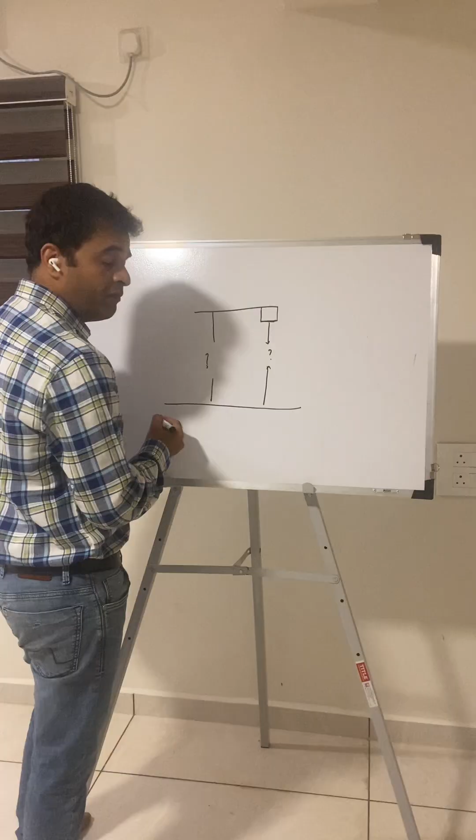Now this is the slab. Now this is the floor. Now this is the height between slab and the floor. There will be a beam, which is a conventional structure. Now this is the height between unfinished floor, or you can say finished floor. From here, bottom of the beam, what is the height? Now why is height important for us?

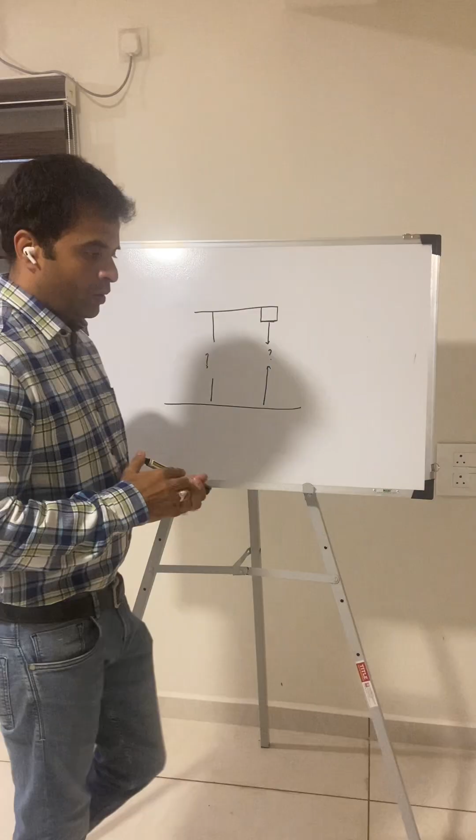The height that we require for these kinds of facilities is mainly for running the services above the fall ceiling.

Now one more doubt arises. Can I fix my operation theatre light and pendant if I have a fall ceiling height of around 8 feet 5 inches? Or do I have to have 9 feet or 10 feet height only as far as fixing the OT lights and pendants in the operation theatres? No, it is not so. Irrespective of the fall ceiling height, you can fix your operation theatre light as well as pendant. We will talk about that a little later. Let us understand why height is important as far as above fall ceiling is concerned.

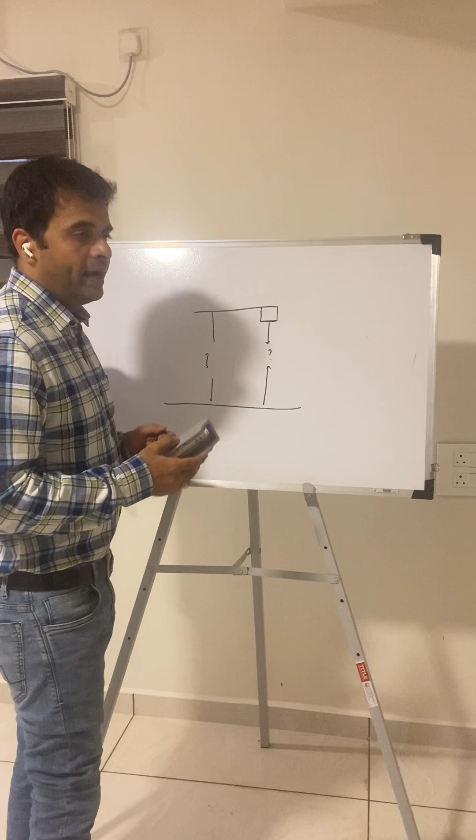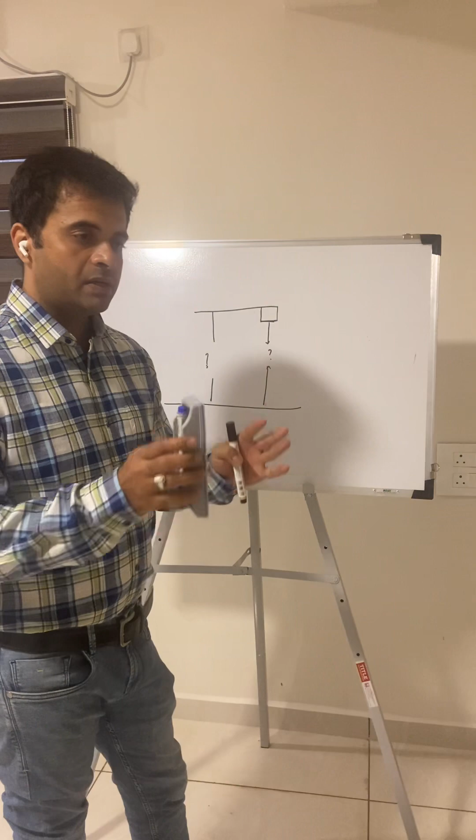Now this is a conventional structure. Why is height important? Height is important to run the services above fall ceiling, provided you are following clean room concepts. Do not bother about the height of the slab from the finished floor level if you are operating your operation theatres and ICU with a split AC, which is a total deviation from the regular standards. If you are operating with a split AC and you don't require even the fall ceiling, and it's a clean environment out there, so even if you have around 9 feet of fall ceiling height also, it's okay, no problem.

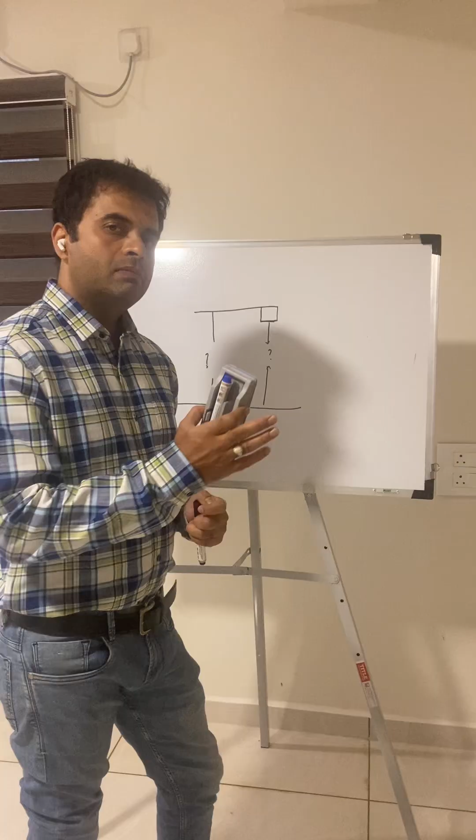But that's a deviation from the regular standards. If you are looking for clean air inside your operation theatres and ICU, then you require a particular height that is needed only to run your services, especially the ducting. Now when you want to achieve the clean room inside your operation theatres, there are guidelines given by ISO 14644-1.

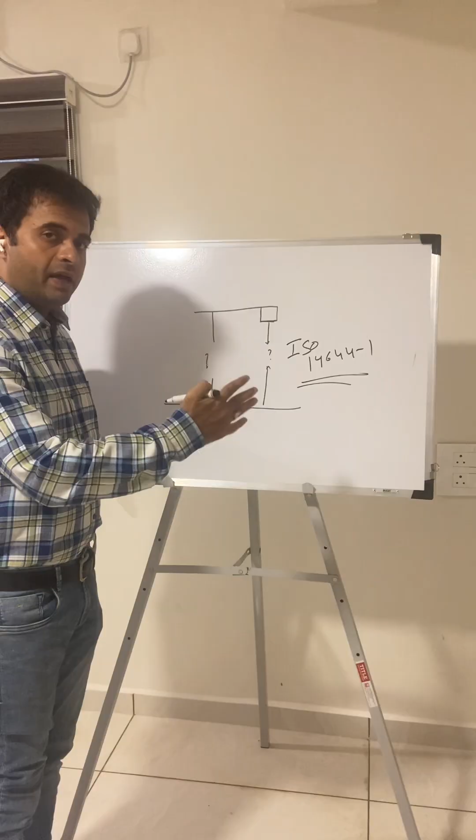I'll just write down the guidelines, you can Google it. ISO 14644-1. Now this defines a classification into ISO 5, ISO 6, ISO 7, ISO 8, ISO 9. Let us see ISO 5, 6, 7, 8 and 9.

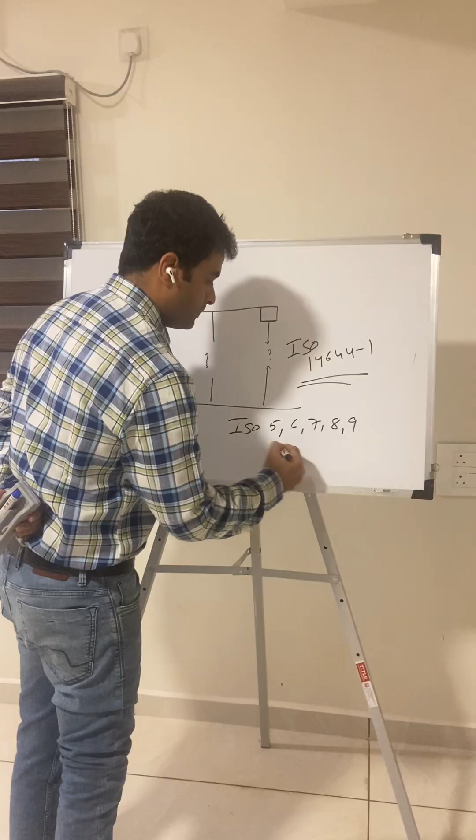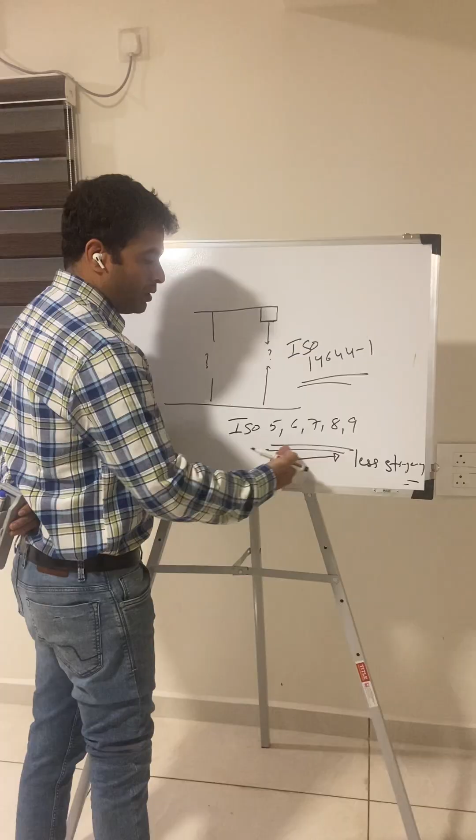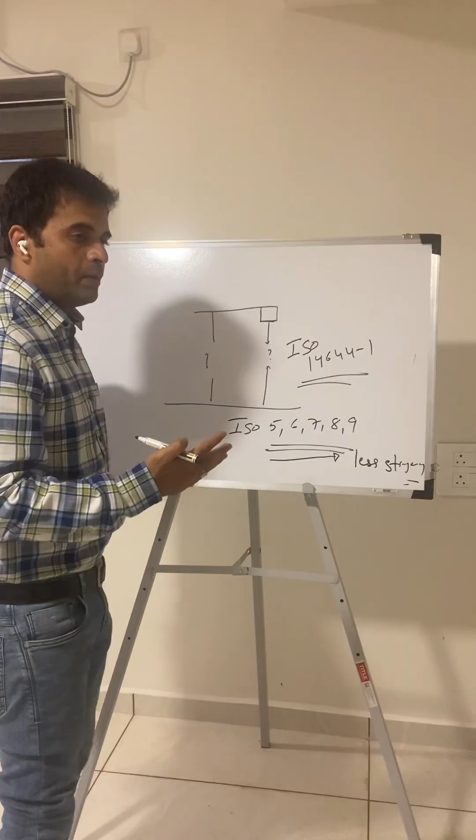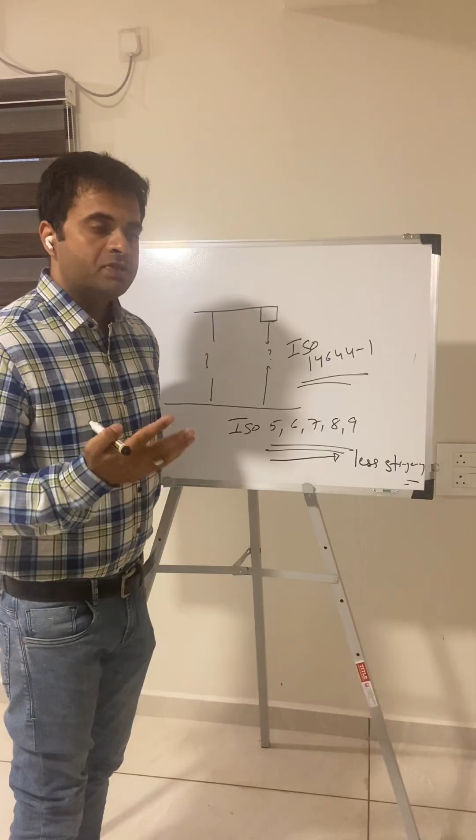Now, more the ISO certification or parameters that you follow, less is the stringency. That means the more towards ISO 9 you go, the classification gets deteriorated, I would say. So if you have ISO 5, that means your environment is highly maintained, more stringent protocols that you are going to follow in ISO 5. Same way, ISO 9 is less stringent.

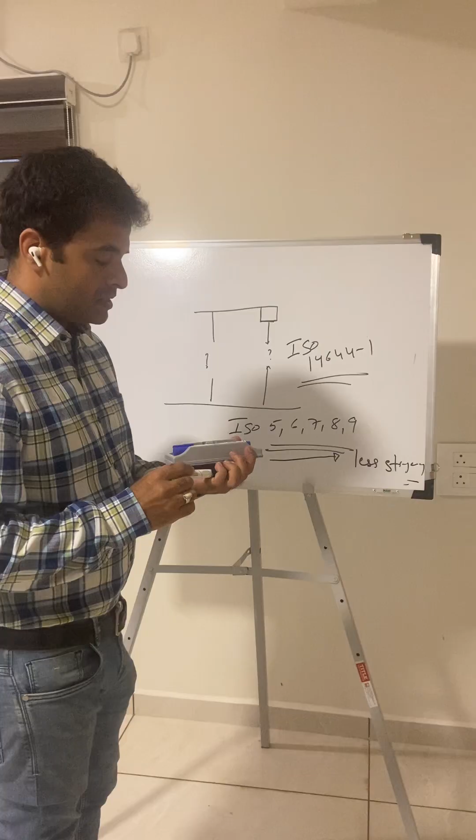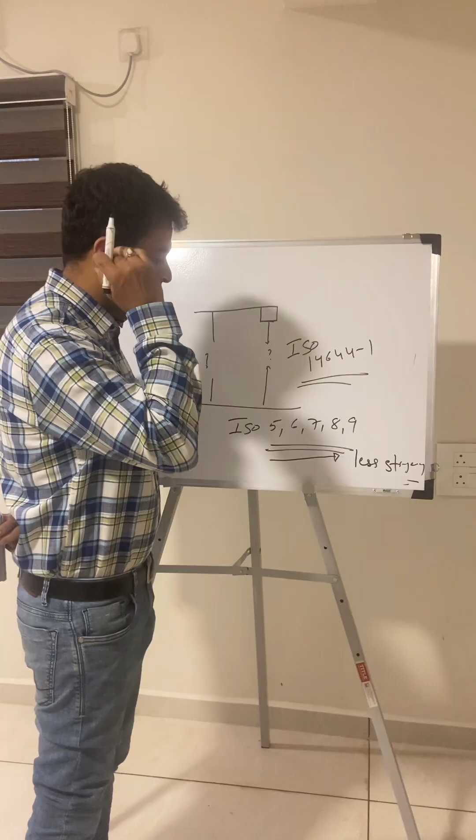So now, as far as operation theatres and ICU are concerned, I personally believe that at least in your operation theatres and ICU at the table level, I'll explain what is table level and what is filter level. At least for the table level, you have to achieve ISO 7.

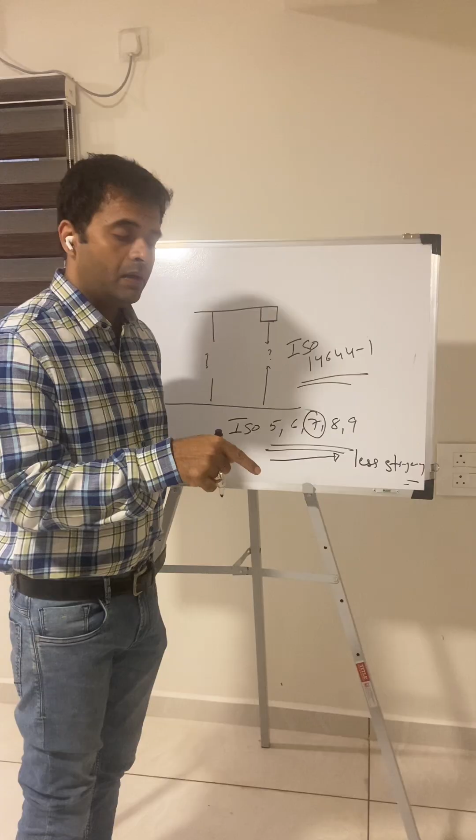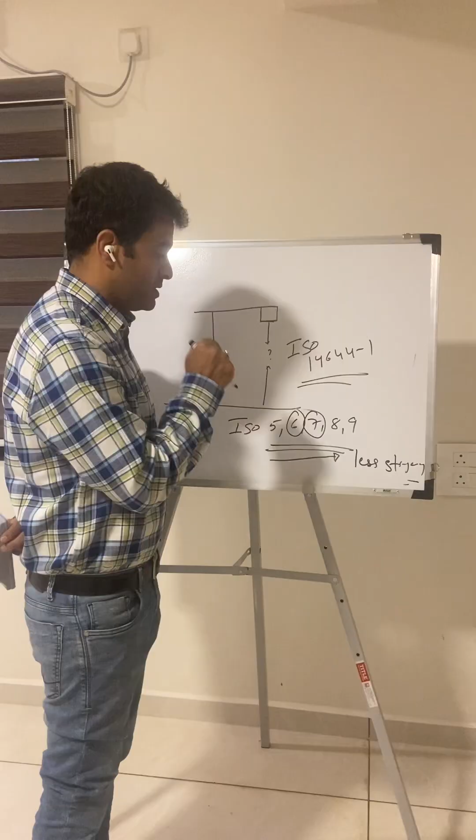Now, to design ISO 7, to have a validation report at table level ISO 7, you have to design at the static load at least minimum ISO 6. So when you design as per ISO 6, there are more chances that you will definitely achieve ISO 7 at the table level, at the peripheral level.

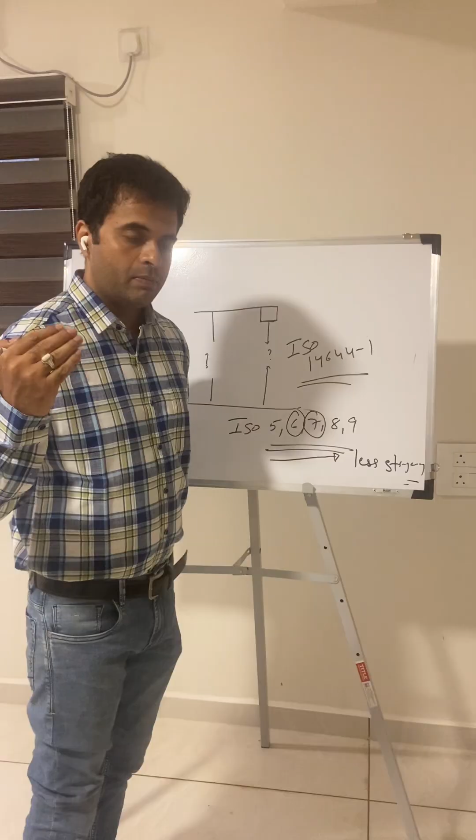So to do that, there are proper calculations as far as air changes per hour is concerned. The subject is a little deep, so we will cover it up when we take up those detailings.

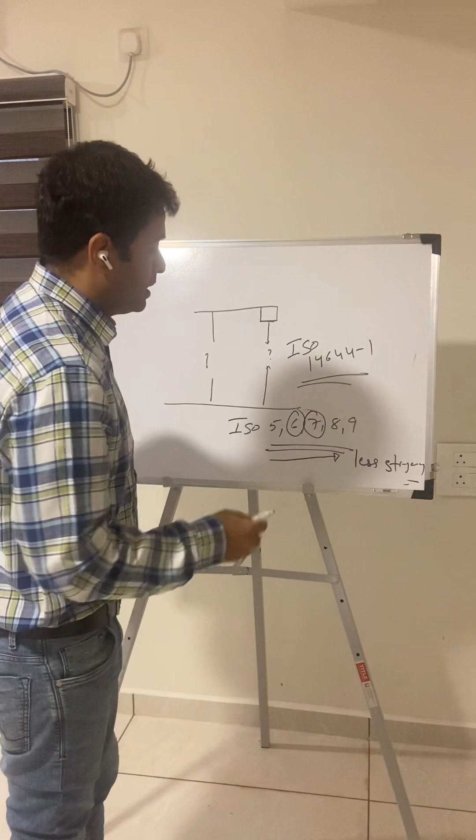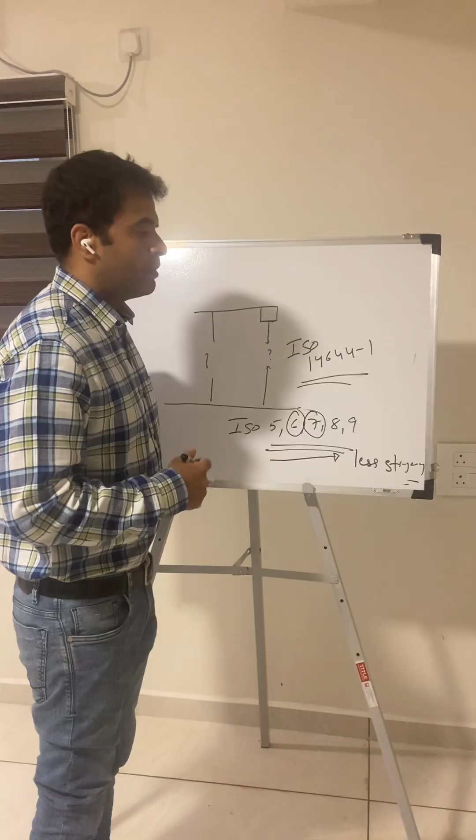Now let us understand, we are at ISO 7. What is table level, what is peripheral level? So to have a proper height to run my ducting, that totally depends on what the client is expecting. If the client is expecting just ISO 9, then we can manage with whatever height that you have. If the client is expecting to have split AC in their operation theatres and ICU, we will adjust whatever height that is possible. So now let us understand what is table level, what is peripheral level.

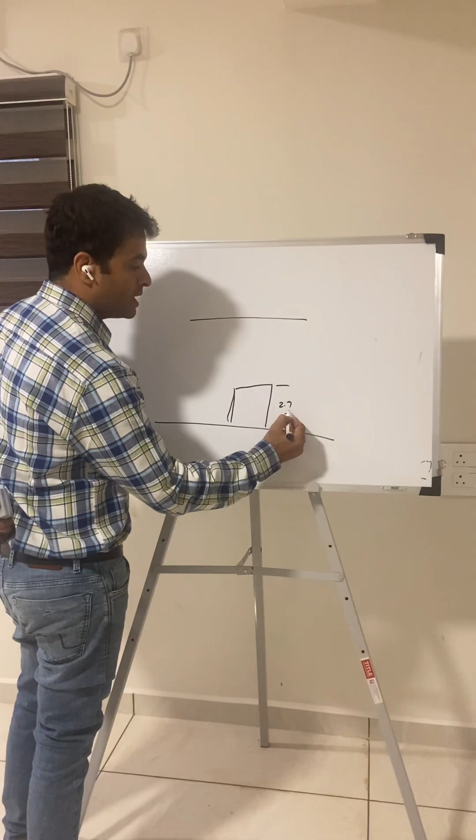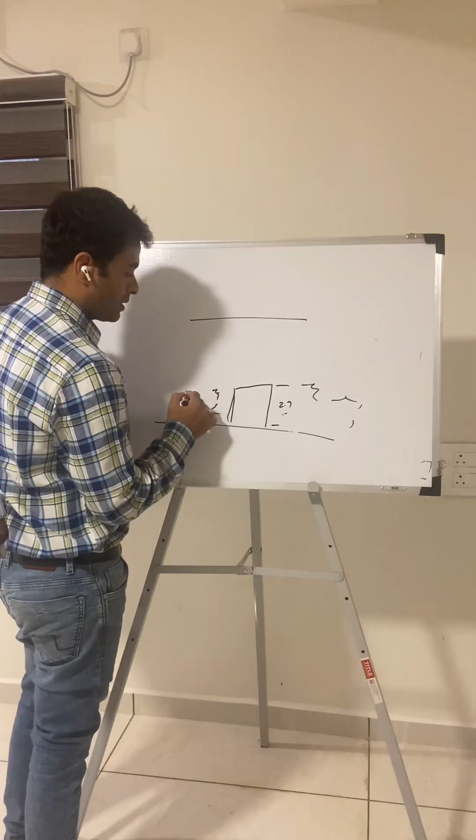Now this is your false ceiling, and this is your floor. You are operating on the patient from this area, from the floor somewhere around 2 feet 7 inches, with adjustable OT lights and OT tables. Now imagine at this juncture, if you do not have proper particle control, then what's the point in having the laminar flow? The air is coming from here.

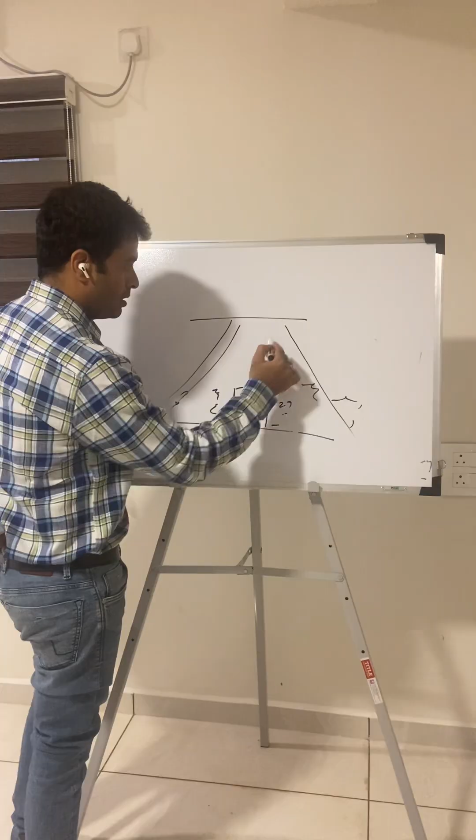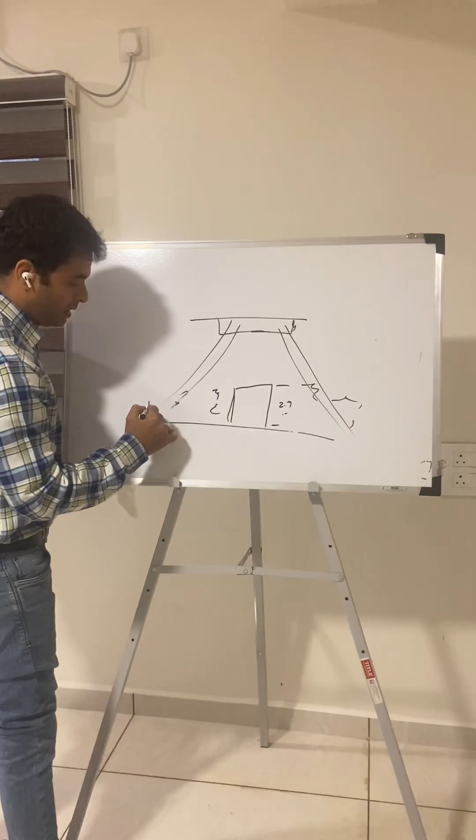So now we'll talk about this. This is a filtration level. Air coming from the HEPA module is again taken back from these risers and goes back to the system again. Okay, now this is the OT table.

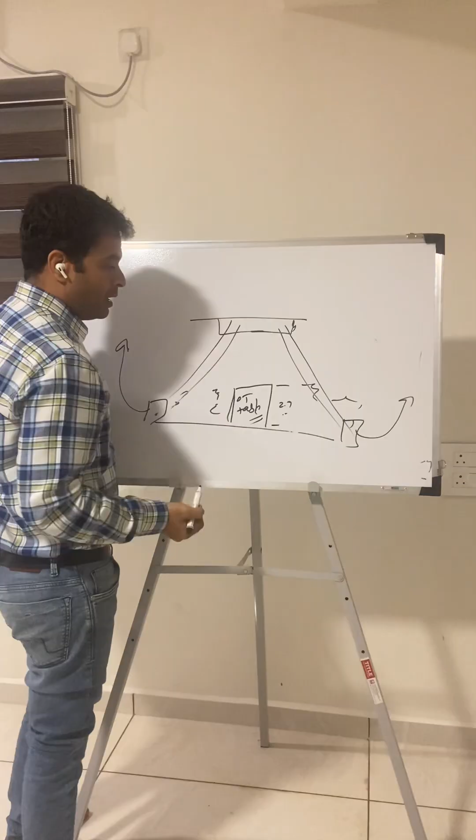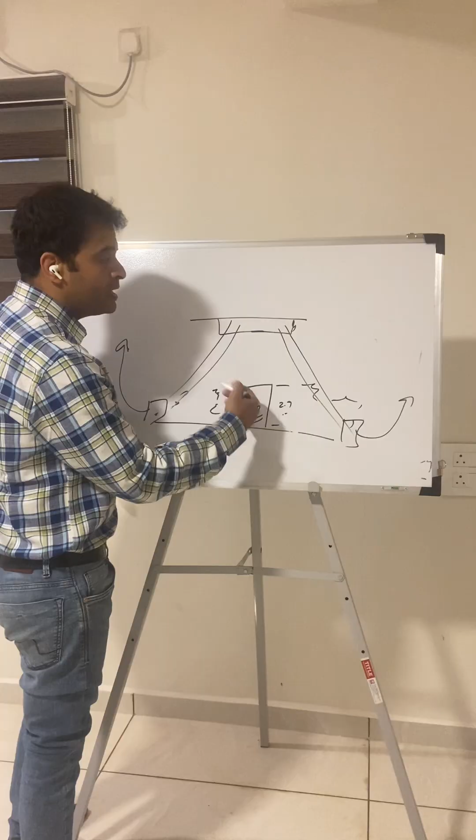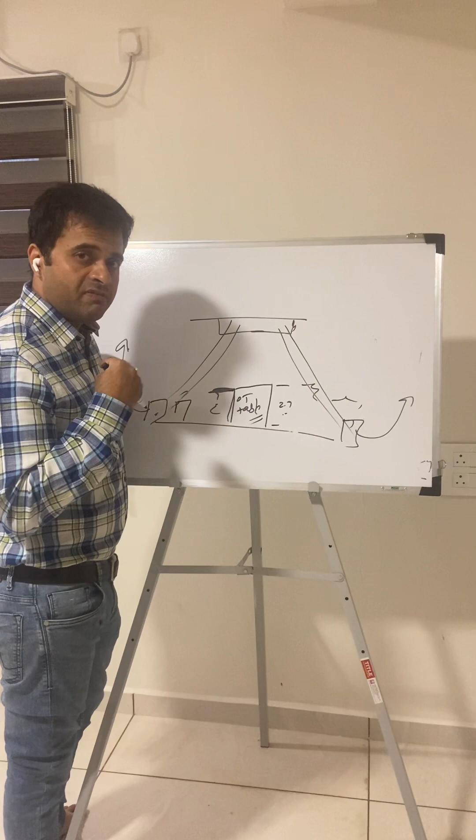Now when you do not have proper air management, or proper particle count at the table level, then there is no point in doing this entire clean room activity. So I personally believe you should have good validation results at least at the table level. Here if I keep my particle counter, I should achieve ISO 7. And also if I keep my particle counter at the riser level, I should achieve ISO 7. Then I can define that this operation theatre or ICU is complying with ISO 7 classification.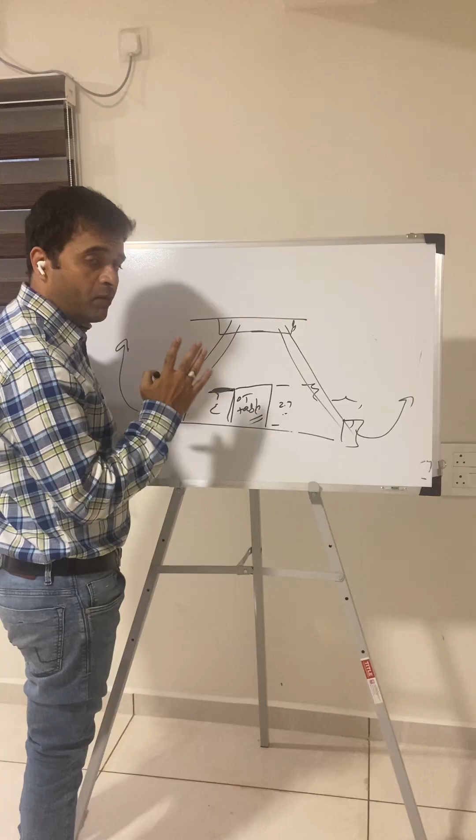A proper validation has to be done for that. So proper validation has to be done before we conclude that this operation theatre complies with ISO 7 guidelines. Minimum achieve ISO 7 in the operation theatres and ICU.

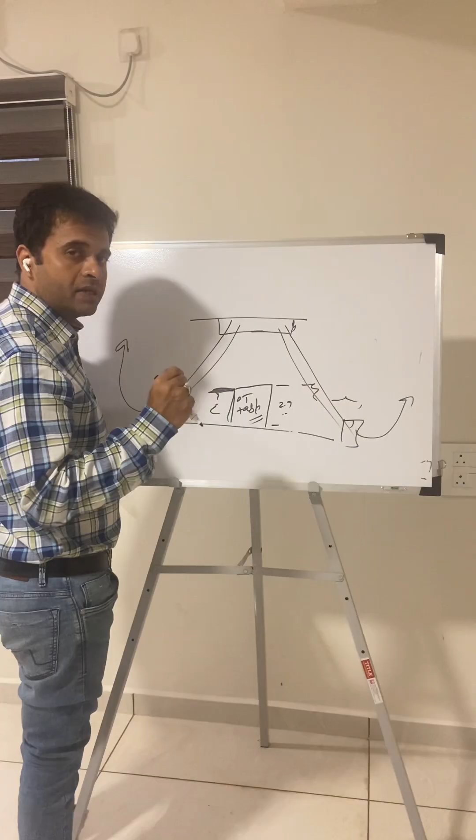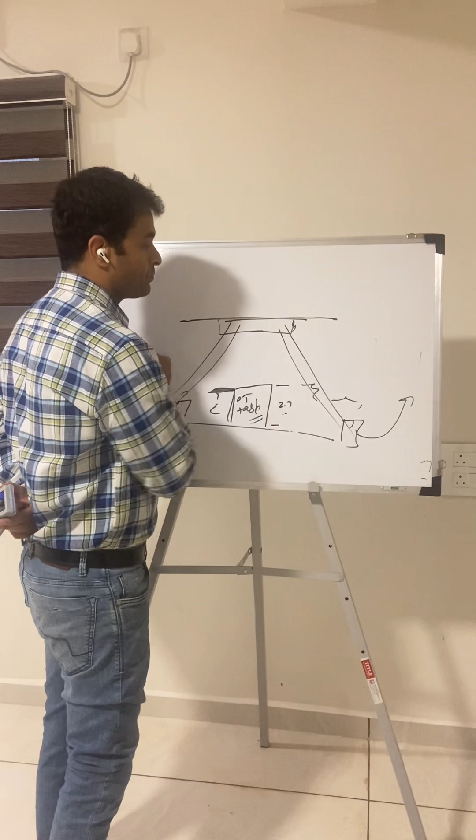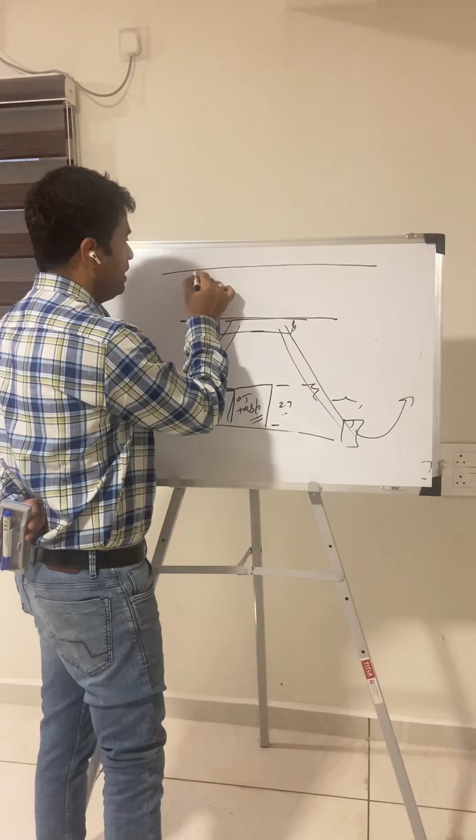Now, when I have to design all these aspects, height plays a very important role for me because this is the false ceiling. Now this is the slab, a civil structure slab. Whatever ducting I have to run between the false ceiling and the slab, within this area I have to run all my ducting.

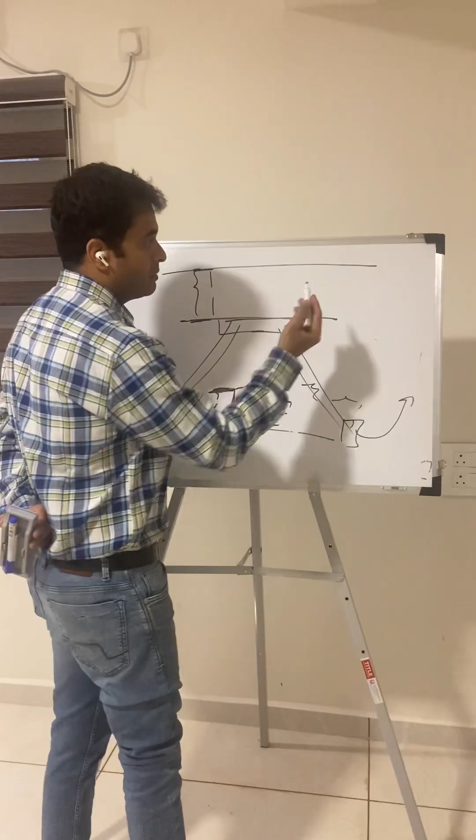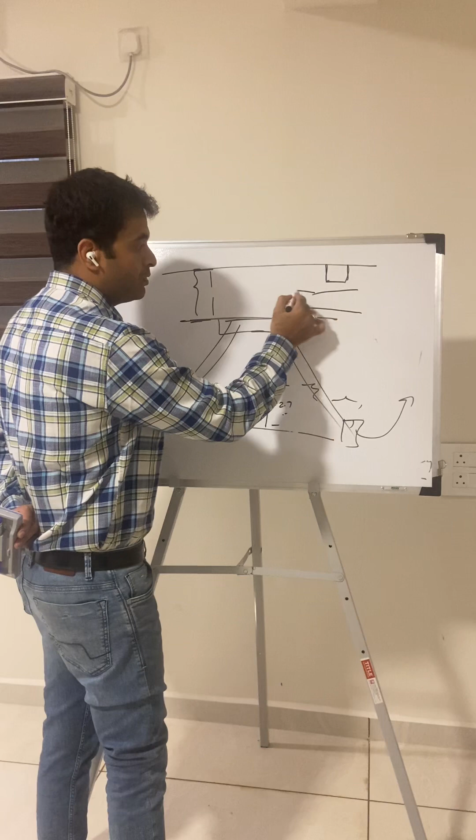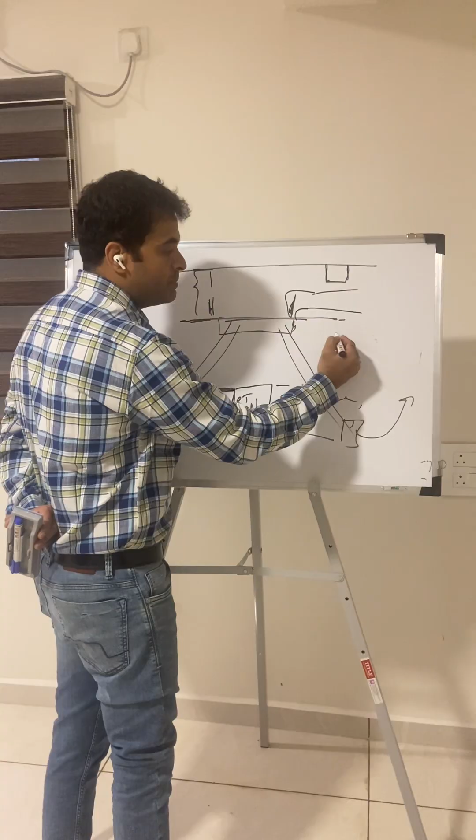Imagine I require somewhere, this is the space, this is the peripheral beam. Every building will have peripheral beams running around. Now if I have to run my ducting and supply to this particular area, this is the plenum box, flush toward this. When I have to run my ducting here, I have to have a certain space because this is predefined. At least minimum 8 feet 5 inches is what I am expecting as a false ceiling height from finished floor.

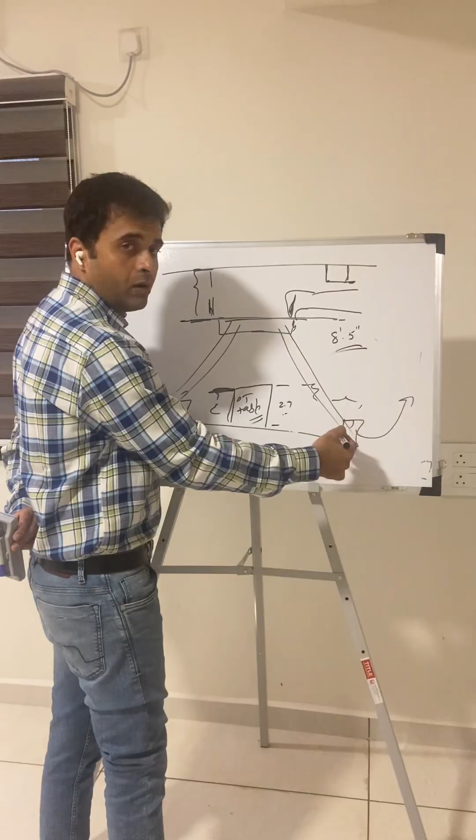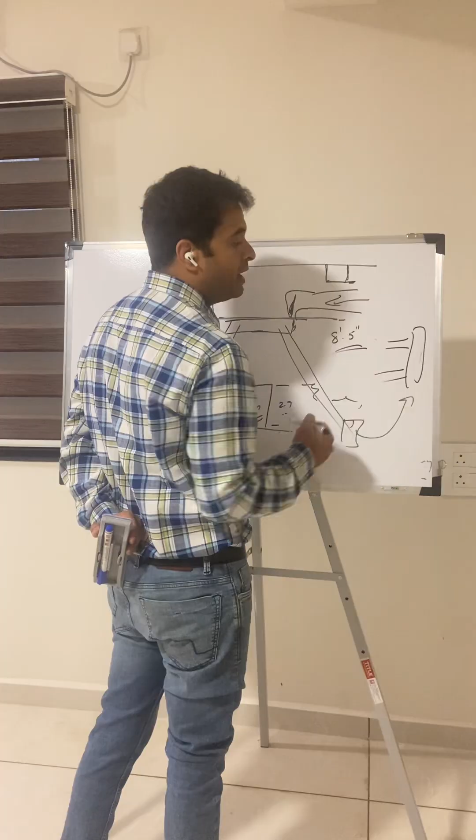Now if I have to have proper designing and achieve ISO 7, if I do not have proper height between the beam and the false ceiling, beam and the floor, then my ducting or other services will not come from here. So what we can do is divert the entire duct outside itself and bring it inside. These are the alterations we have to do.

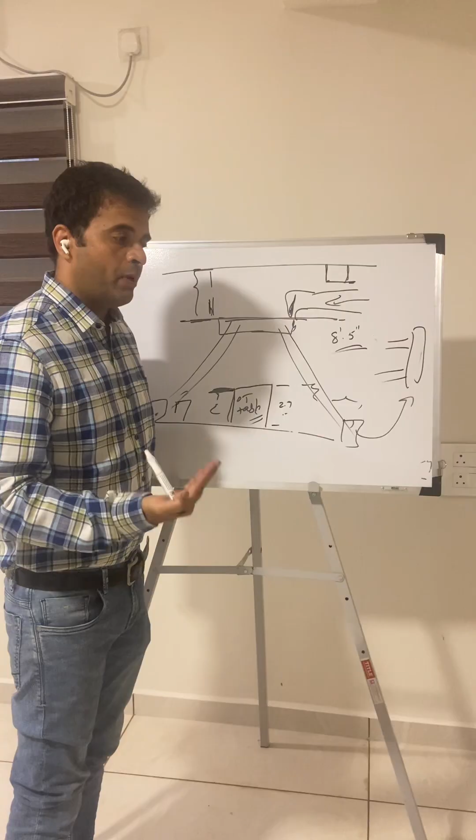But when you are constructing a new hospital, when you are about to do a casting work, then it is better to have proper consultation from the expertise and define your proper height, so that at a later stage we will not end up doing some adjustments.

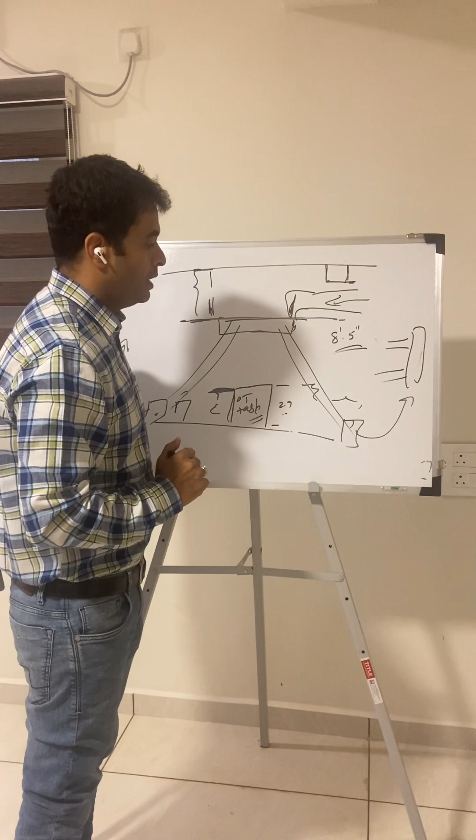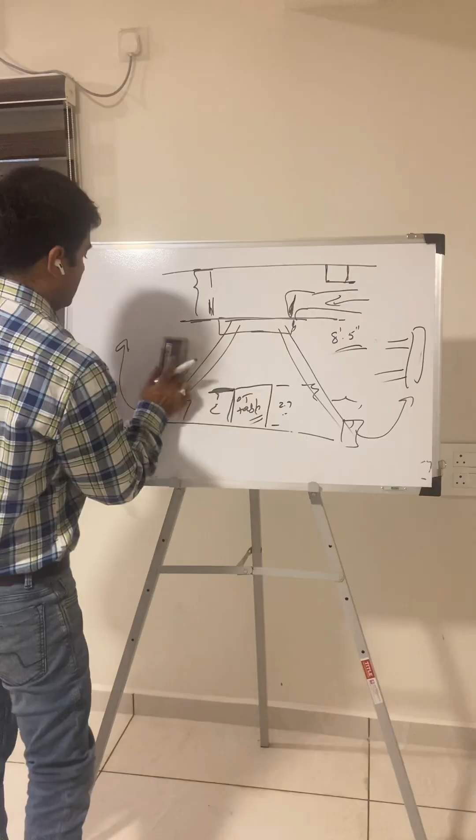Now this is regarding the importance of the height. It also depends on what the client is expecting. Just having SS wall, SS ceiling, vinyl flooring, and one door doesn't fit the criteria of a proper operation theatre. So for a proper operation theatre, you have to have proper air.

So now this is the reason height plays a very important role. Now let's come to what is the minimum height that I expect in my projects. If you are going with a PT slab, the beamless slab, post-tension slab is what a PT slab is called. So those PT slabs don't have a beam. When they do not have a beam, then whatever ceiling height I have, that is going to be the final height for me, where I can bring my ducting inside and give you an entire air delivery system.

But even if you do not have a proper PT slab, and you have a conventional structure, then what we will suggest, if you ask us at the time of construction itself, is that it is better to have an inverted beam here, provided you don't have any other rooms at the top. Then here also I can get my ducting in.

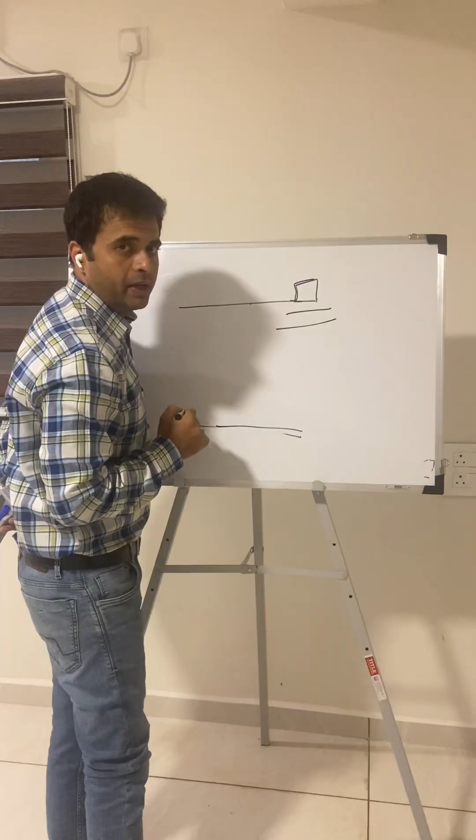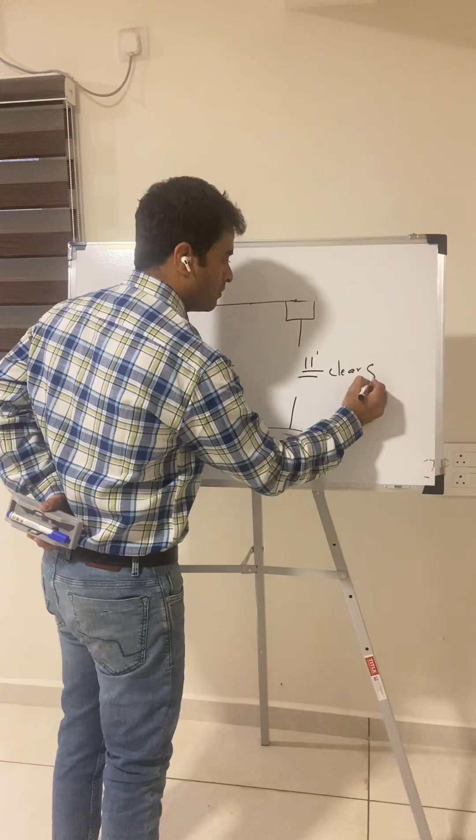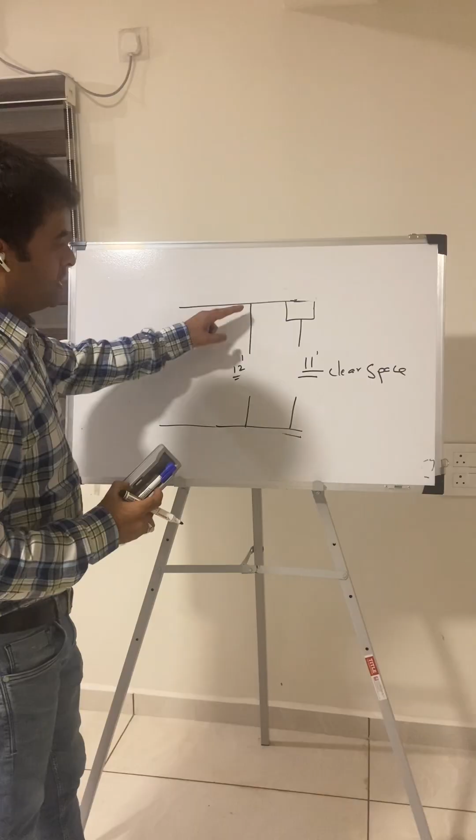So now height plays a very important role here. What is the minimum height that I expect? At least I need to have 11 feet as a clear space. Now 1.5 or 18 inches goes to the slab, so somewhere around 12 feet. This is the minimum height that I expect, so that I can deliver you a better project and better air management, and patient outcome will be good, and you will have a proper validation report also.

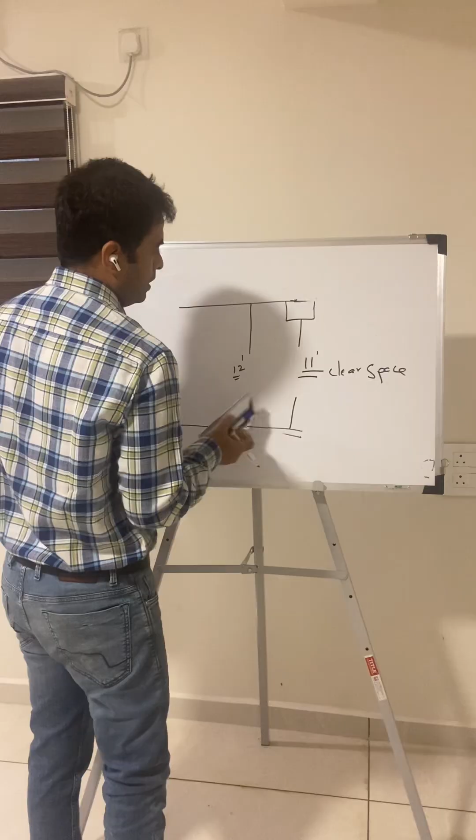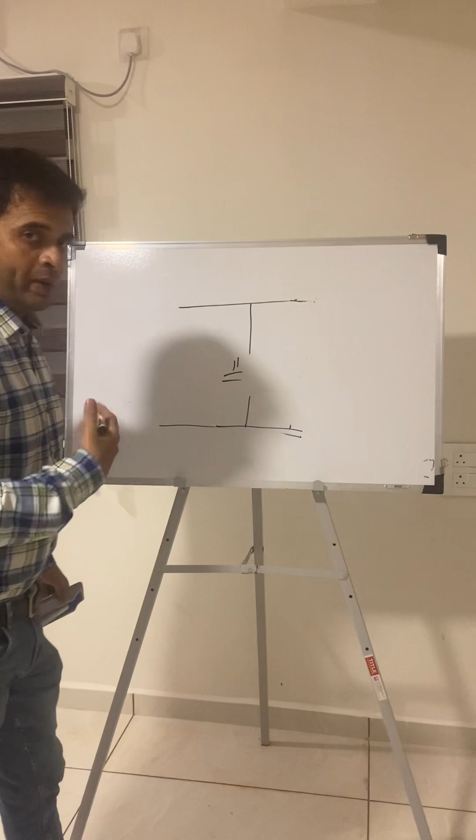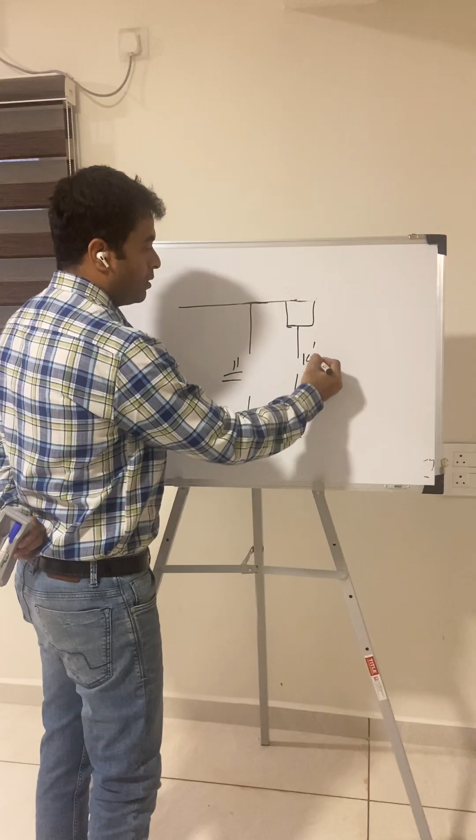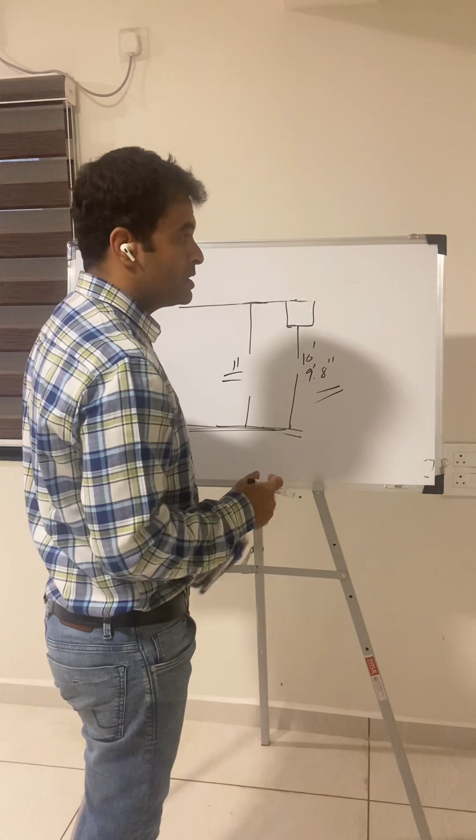Now this is what I need. In some projects, clients tell me they already have 11 feet height. But when I go and check, they'll be measuring from unfinished floor to the slab. This is not important for us. We need the beam bottom, because all the services are going to enter from there. So you end up having around 10 feet, or 9 feet 8 inches, which is not sufficient for us, and you will not achieve proper classifications. So it all depends on what the client is looking at and how he accepts new things and new learning.

So we understand that height plays a very important role. There are other parameters to explain as far as clean room is concerned. We will take them up one by one because the video will be lengthy.